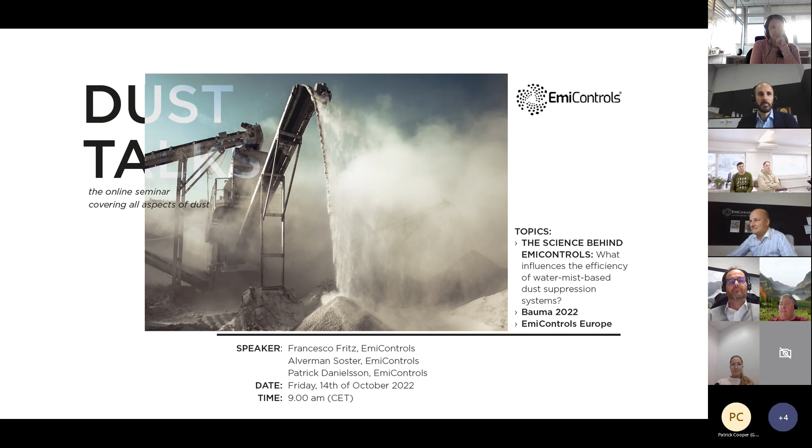So thank you, Patrick. Today it's quite an exciting topic, also almost scaring: the science behind Emicontrols. But in fact, we are talking mainly about the physics, the physical phenomenon that is behind dust abatement. So please allow me to be a little bit technical today. I will not share formulas with you. I tried to do my best to represent that using graphical representations and charts, but it will be a little bit technical.

So first of all, what is the scope of this presentation, but also of the activity we are currently doing? Patrick already introduced in previous Dust Talks and in general meetings that we want to move from manufacturer of dust binding machines to a dust expert. In order to be a dust expert, there are some basics we need to know. We need to know how dust abatement works and what influences it.

To do that, there are two ways. Either we do our own research, and this is for sure something we have to do. But before doing that, it makes sense to start having a look at literature. There is already so much in literature, so many people have been researching and proving things about dust, that it's worth having a look at it. So this is what we are going to see today: what is already known in literature about dust.

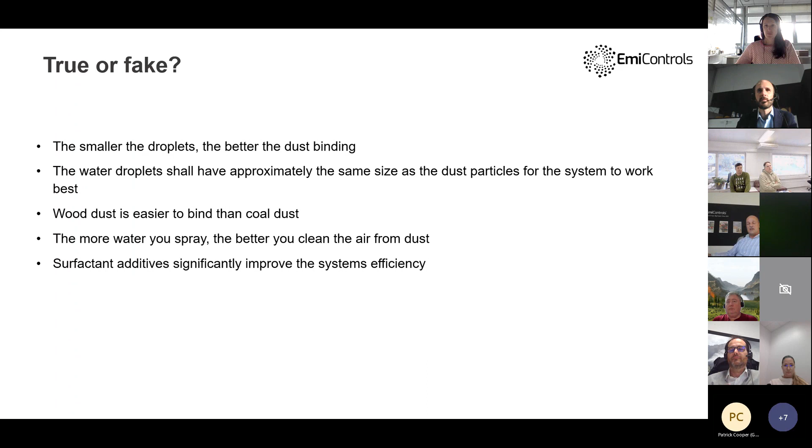Another example, wood dust is easier to bind than coal dust. This is something I heard in the last couple of years. Or another statement, the more water you spray, the better you can clean the air from dust. Another one about surfactants. The manufacturers of surfactants say use our product so you improve your dust efficiency. Is that true again? So these are the kind of things we wanted to understand.

Of course, this is not the way that we find in reality with our dust binding turbines. But these are some specific testing conditions, and they are reproducible. So this is just to give an idea what is used. And then to measure the dust concentration at the exit after dust abatement, they typically use some laser scattering system. This is also something we will be using in our commercial sensors.

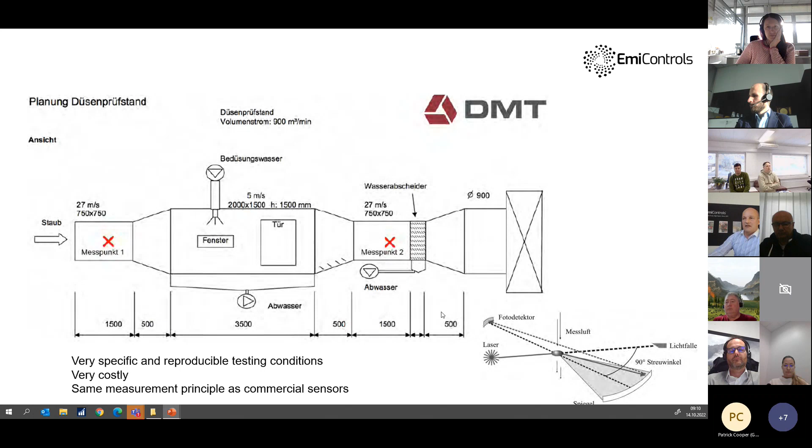Of course, it's very costly. You see here an example of this equipment. It's very costly equipment, it's not something you can just set up for 1 week. There are people that really have been spending years studying this dust. So again, it's worth having a look at it and seeing what they found out.

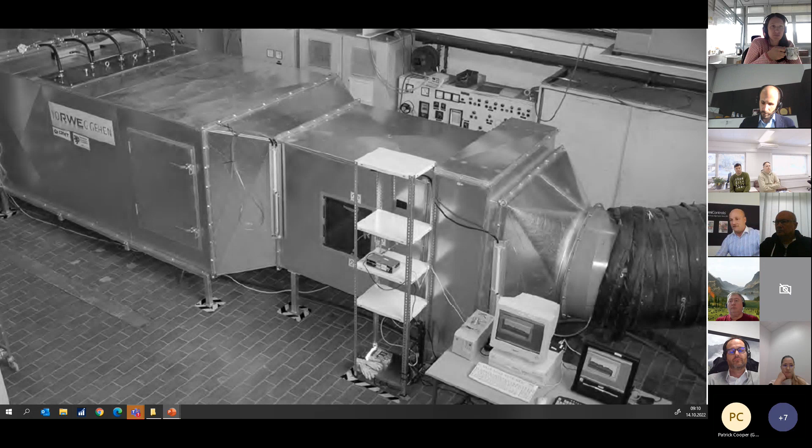So first thing is definition. It's important to talk the same language. What do we mean by dust binding or dust abatement? This is when a dust particle gets in touch with some water droplet, and the two bind together, and because there is an increase of mass, they go down to the ground because of gravity. So this is abatement: dust particle and water droplet hitting together and increasing mass. This is what we are talking about when we talk about dust abatement.

What type of dust or particles exist? There are a lot of different particles. There is, for example, smoke. There is sand. There are fumes. There is really quite a wide variety of particles. But the ones we care about are typically these ones. So coal dust. It doesn't have to be coal, but this is what we care about. We don't care about fumes or smaller particles.

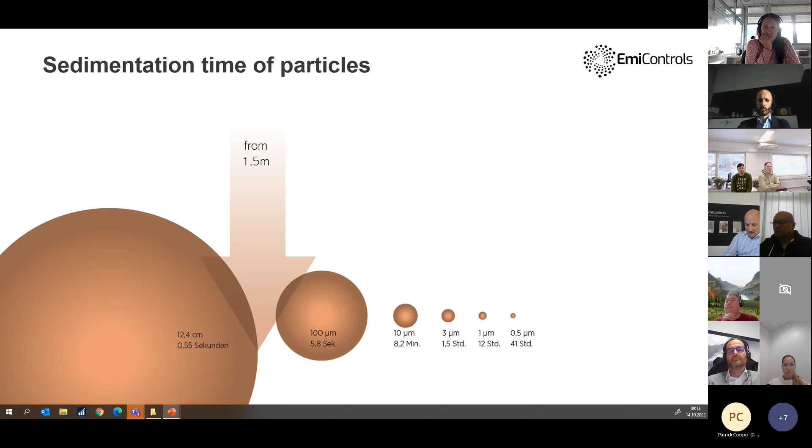Now we are going to see what influences the behavior of dust abatement. There are several parameters that influence that. An important piece of information we have to know as dust experts is the so-called Greenfield gap. So what is the Greenfield gap? The Greenfield gap tells that there are some sizes of particles that we just cannot lay down. It just physically doesn't work. And these are the particles around 1 micron.

The 1 micron particles: there are several studies that have been proving that. If you want to see the literature references, we can send them to you. These are just 2 different studies, but they demonstrate the same. The 1 micron particles cannot be laid down. If we go bigger, the 5 micron, 10 micron, it works. If we go smaller, it works too. There are 2 different physical behaviors. But 1 micron is just the size where you cannot lay them down with any type of binding.

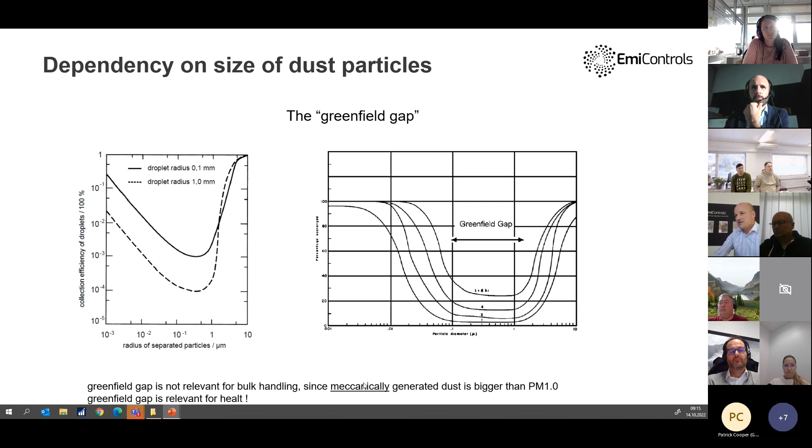On the other hand, this is not so relevant for us, because all dust generated mechanically by crushers and so on is bigger than 1 micron. 1 micron is typically pollution and so on. So still, it's a problem for our health, but it doesn't work with dust abatement. We have to put some filters, like in industry and so on. So we cannot abate that with water. Okay, so this is an important concept to know.

This is also another study. It's quite nice to see, I think. You see here some PM10 particles, PM2.5 particles, and PM1, and they alternate water mist off, water mist on, water mist off, water mist on, and so on. And you see how the concentration of PM10 goes up without water mist and down with water mist, up and down and up and down. The same happens with PM2.5, but PM1, no change. Again, it's a demonstration that with PM1 particles it just doesn't work.

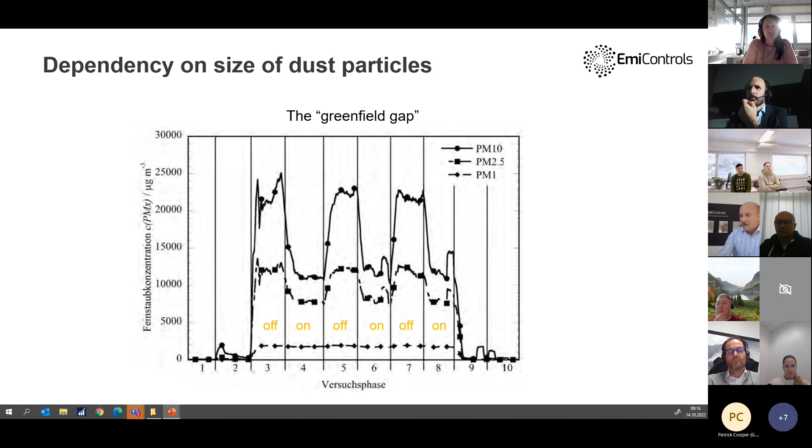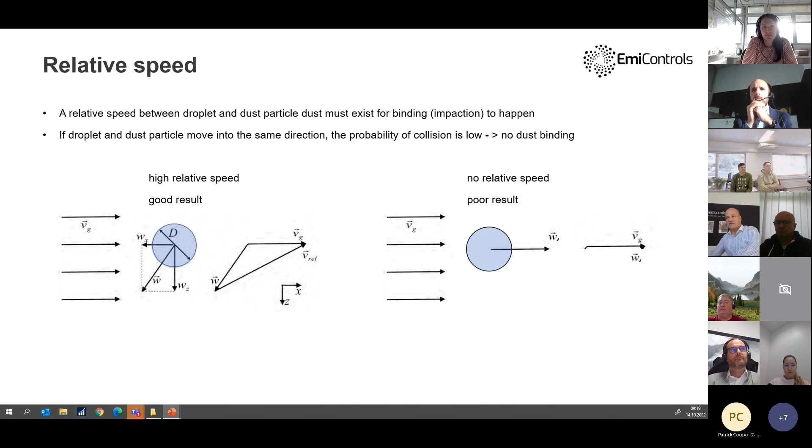Then another parameter is the water flow. So how much water do you need? Is it true that the more water, the better result? Yes, it is true. Okay, so in fact, the more water you use, the better you get the efficiency of your system. But it's, let's say, logarithmic.

Okay, so what does it mean? It means at the beginning, you have a big improvement with little water. But the more water you employ, the less improvement you then have. Okay, so your maximal improvement, you have it using a little bit of water. If you then use 10 times the water, you don't have 10 times better results. You have just double better results. Okay, so again, this has been proven. This is not just theory, okay? This has been observed in reality.

Then another point are the surfactants, okay? So is it true that surfactants improve the dust abatement? So if we look at what surfactants are and what they do, we see that surfactants are reducing the surface tension of the droplets. Okay, so they make it easier for the droplets to break, and it makes it easier to generate small droplets. But smaller droplets are not always better droplets.

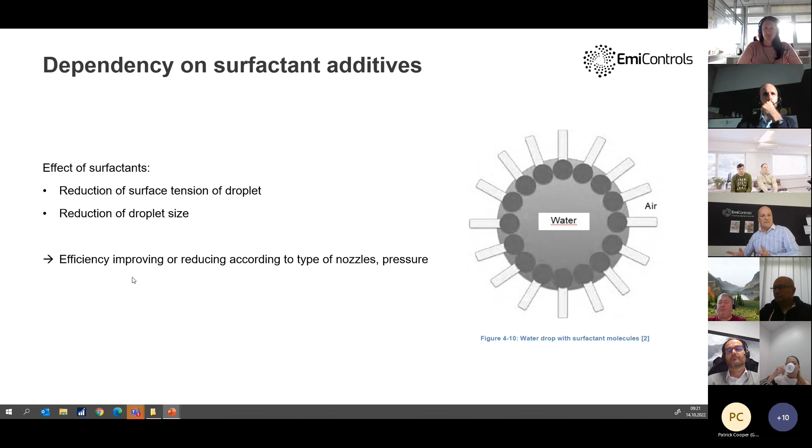Okay, so to resume. We have been seeing the difference of efficiency of dust binding systems depending on the size of the dust particles. So the Greenfield effect. Droplet size, the relative speed, very important. The amount of water flow and the surfactants.

There are some other parameters, but I will not go into these ones, like air temperature, air pressure, air humidity. For example, if you have very hot temperatures, then the boundary of your spray will evaporate, okay? But it becomes too complex and we have no time to go through that. So these are additional parameters. So you see, it's quite a complex scenario, but these are the actors.

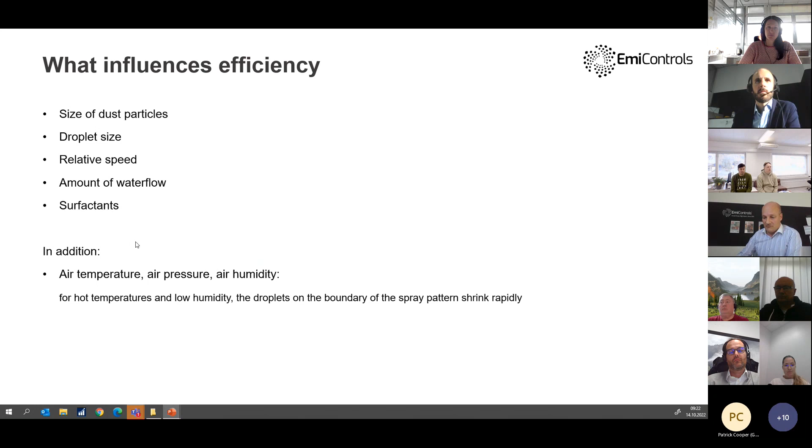These are the parameters. And also, all we saw until now was about impaction or interception. Okay, so this is one type of interaction. And this is the most relevant for us because it concerns the droplets bigger than 1 micron or 2.5 microns. There are some other phenomena that happen for very small droplets, like condensation, diffusion, and electrostatic forces. So we don't really care about those because they happen for very small particles. Nevertheless, just for the sake of being complete, I'll tell you what it means.

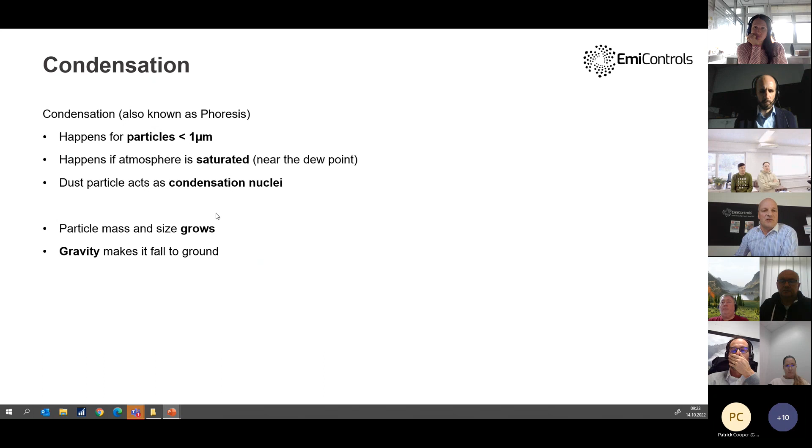Okay, so condensation happens for particles smaller than 1 micron, and it happens when the atmosphere is saturated and near the dew point. Okay, so what happens is that those small particles act as condensation nuclei. And so the mass grows because the humidity is condensing around these nuclei, and gravity makes it fall to the ground. But again, this is relevant in meteorology or also for snowmaking. This is one principle behind it, but we don't care about that for our customers, for our sites. Condensation.

So next one, diffusion. What's diffusion? That's again for very small particles. So less than 0.001 micron, so 1 nanometer. And these particles just have random behaviors, okay? And it can happen that through these random behaviors, they hit some air molecules. But here we are talking about molecules, okay? So you see, I hope, in the video, these are from pollens, the ones generating allergy. So we are here really in the size of big molecules. So again, this is just for you to know, but it's not relevant for our scope.

And finally, electrostatic forces. This is interesting, could be interesting. So if we have droplets that are positively charged and dust that is negatively charged, or vice versa, the dust abatement may be improved because there is an electrostatic attraction between the two.

So in fact, there are some studies, even with dust abatement turbines, that have been started on that topic. One in Japan and one in Germany. But honestly, I'm still waiting for some results. I never saw some results. So I guess it's very complicated because you don't know if your dust is charged positively or negatively. So I think it's difficult to drive.

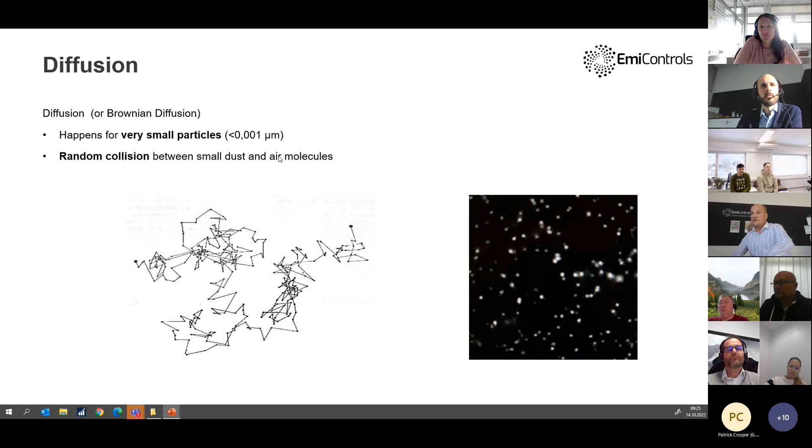Okay, so that was about the different type of interactions. Okay, so this is what we saw is the science about particles in experimental conditions. Next question is, how does all that apply to our dust binding turbines? So how should I put it? Let's say there are good and bad news.

The bad news is we don't know. We don't know because there are so many parameters that you have to consider outside, okay? And today we don't know. But the good news is nobody knows. There are no studies today. And the good thing also is that we are investigating that. We already started doing quite some effort to understand how we can apply all this theory to our dust binding machines. For example, we know our droplet size. That's an important thing to start from.

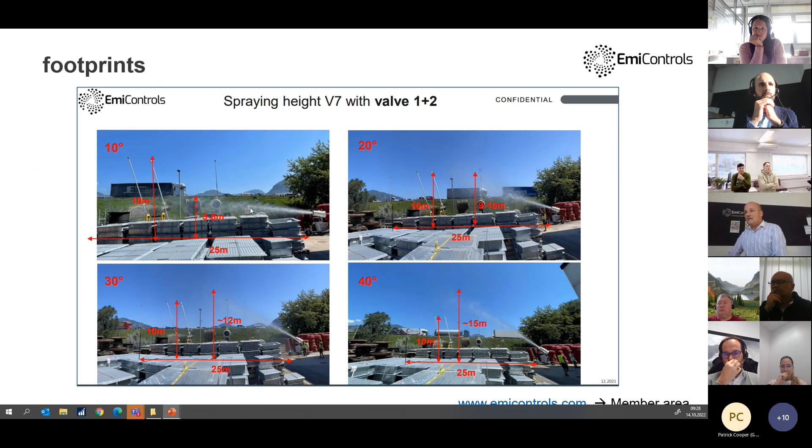And here there's still a lot of work to do, but we are working on it, and we will be working on it also in the next weeks and months. And I hope we will be able to be back soon to you with some new information about the efficiency and the dust abatement behavior of our turbines.

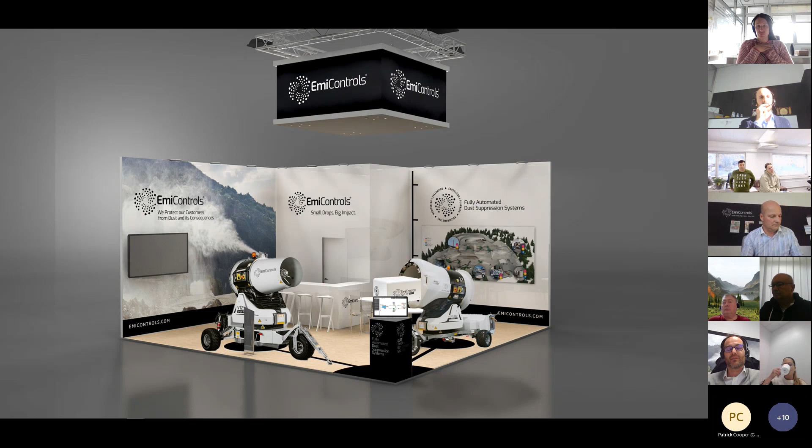And now we are implementing several applications, and now we want to show to our world what we are doing with our software. And the next slide. And we want to inform you that we have a new office, a new branch, EmiControls Europe, a new reality that will be based in Germany, close to Frankfurt. It is the first branch that we open. And this company will be officially launched on the market, and will be present with the second booth on the outdoor area of the Bauma show.

Again, also here you will have the possibility to talk with our colleagues that are taking care of the German and Austrian market. We present our equipment, the machines, the H2 family, but also in this booth we have the conductor, the Kurt software with weather station, and it will be very, very interesting to explain to you, but also to your customer, to all the people that will visit us, the way that EmiControls is going in the future, just to be more efficient, especially from the water consumption, power consumption point of view, maintaining a very, very high efficiency in the dust abatement.

So finally, after some years that we were waiting to have the possibility to show what we are doing to all the world of dust, finally, in 10 days, we are there, and you are more than welcome.

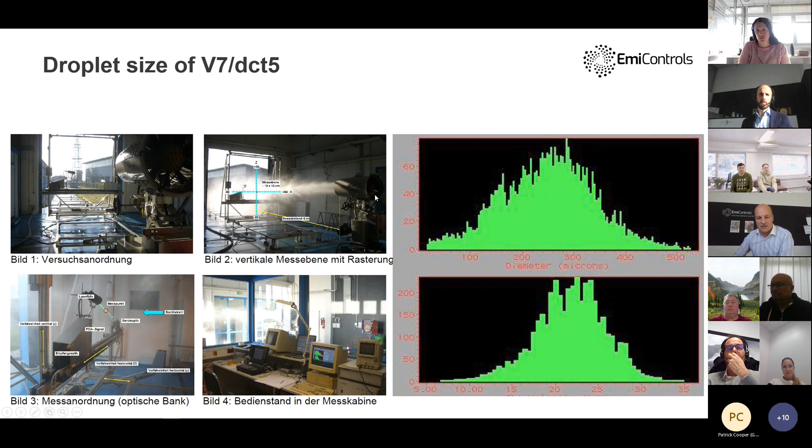That means that's the value where you have 50% of your droplets. For example, in this case, let's suppose it is 260 maybe, okay? So that means 50% of your droplets are before and 50% are after. So on this slide here, they use the DV50 parameter. That's the most used one. Okay, thank you, Francesco, for the clarification and explanation.